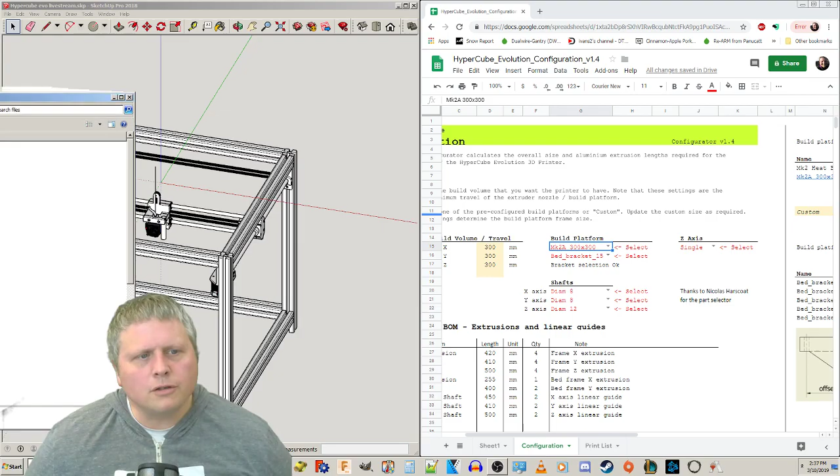So that's why we're going to use- hey, man, the guy who designed this, big ups to Scott 3D, again, went above and beyond what the normal RepRap person does. There's a kind of an attitude in RepRap of like, hey, man, I've done a little of the work, tough luck, you don't need me to hold your hand through it, and I like that, actually. It's reaffirming of that kind of experience-is-king attitude that dominates real makers.

And but you know what? It doesn't hurt to kind of help people along when they're new.

So look at this thing here. If you look in the folders for the Hypercube Evolution that Scott 3D has shared with us, there's an XLSX file. It says Hypercube Evolution configuration. That's an extension for Microsoft Excel spreadsheet, which does the calculations for you.

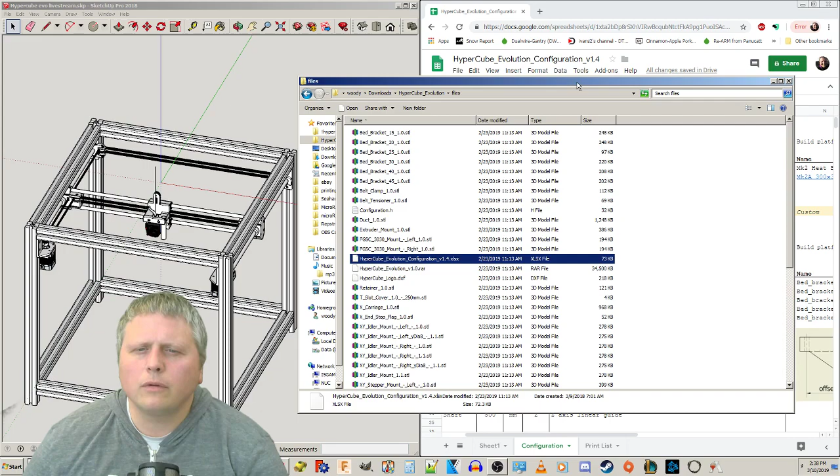You don't need to actually own that. What you can do is take this and upload it to Google Drive, which is completely free, and have it convert it, and it seems to work just fine in Google Drive, at least for what I've been doing. So let's take a look at this document that I have imported. If you need help doing that, there's a lot of guides on the internet on how to import spreadsheets into Google Drive and convert them and use them live.

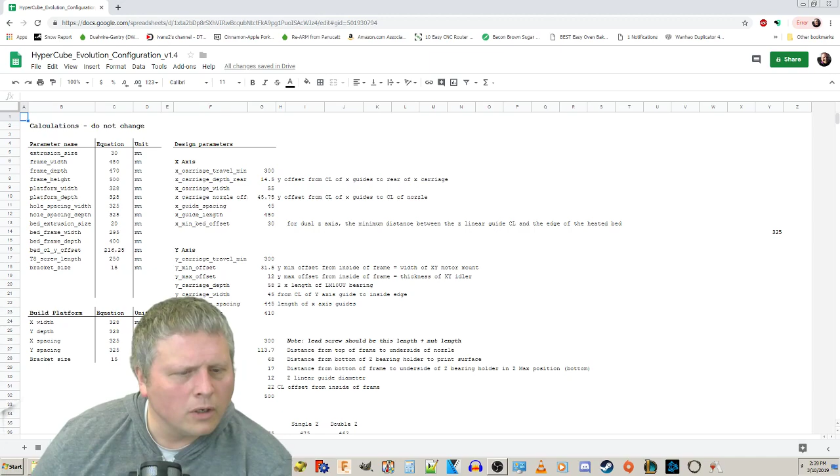Okay, so if we look here, you're going to start on this sheet, and this one doesn't seem to be as useful, at least for what I need right now. Basically, what I need to tell you is that I have been building it with the wrong dimensions. I just assumed, let's use 500 millimeter rods. Now, there's a good reason I'm probably going to end up doing that when I made my modified version.

However, the whole point of making this on SketchUp before we go into something more advanced like Onshape or Fusion 360 is the idea that you want to just get an idea of how things work together, and that's what we're going to do here. So we're going to actually build it true to what Scott 3D had intended, with the exception of the bed and some things like that. And there's some good reasons for that.

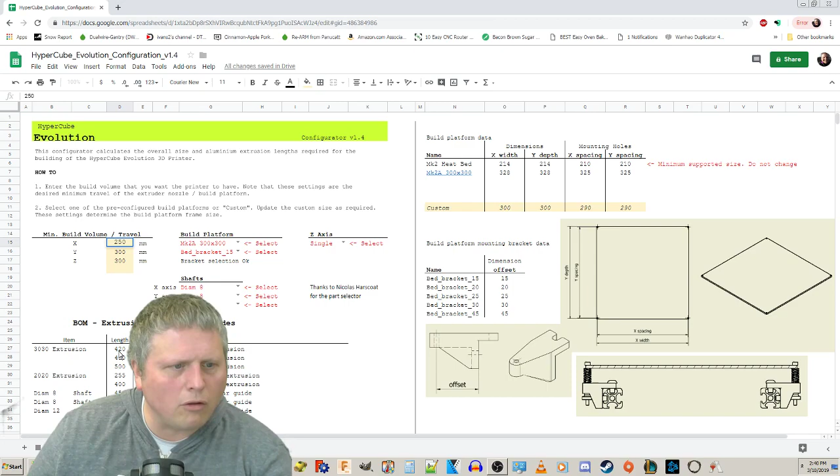All right, so look, 300 by 300 by 300. You can put these travel in here. Now I'm not going to change these for right now. I'm actually going to adjust it down to what his default settings were. Because if you look here on X, if you change this, let's say you said, nah, man, I only want 250 - watch what happens. It will automatically update the data down here for how long you need to cut your extrusions and your shafts.

So let's see what that changes. Okay, so now look down here and see what did that affect. So I'm going to undo it with Control Z. Okay, so it looks like if you follow this, it's changing the length of the shaft for the 8 millimeter shaft you use. Yeah, so see, that's how this thing works. We're going to go back to 300, right? So it changed also the extrusion length.

And so what we're going to do is go through here. Those look fine for now. The only thing I'm going to change from his default is the MK2A heated bed. I think that's a terrible choice for this project. I would never use that.

And the reason is because on the MK2A, the mount holes are all the way at the side. If you look at the video he made on it, he had to actually add extra support to hold the middle up because it was so far cantilevered. It's probably not a good choice for this. I'm going to use a custom choice for my heated bed, and that information is just basically which column we're pulling from - or not a column, I guess it would be a row, or the custom. I want it on custom because what I'm going to do is use a widely available, cheap CR10 heated bed.

It's the one that people are using for the CR10. It's widely available, probably cheaper than that one, and a better choice because the mounting screws for it are actually further in. They're not all the way out at the edges, and so it reduces significantly the offset in these holes, which reduces the amount of sagging possible in the middle that Scott 3D himself admitted he experienced in his videos. So if you look at this, it's 310 by 310 for the external dimensions.

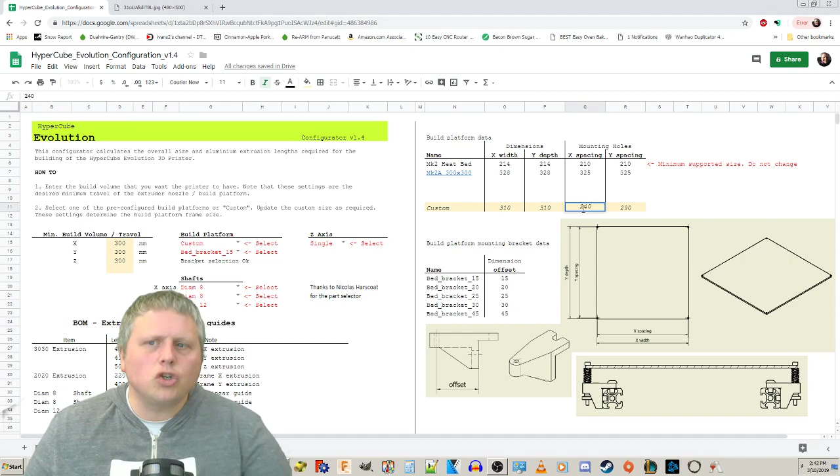It's actually, you have to take away 35, 35 on the other side. That's 70 total. 310 minus 70 gives us 240 offset between all the holes. So I'm going to go in here and put 240. And this should make some changes, 240. And so now this gives us, oh, and we didn't do one thing.

Now look, here's another thing that's important to understand. So another configuration that we have to have is the bed brackets. And that's these. I'm going to use the minimum size possible because I don't want them cantilevered and hang out 45 millimeters from here to here.

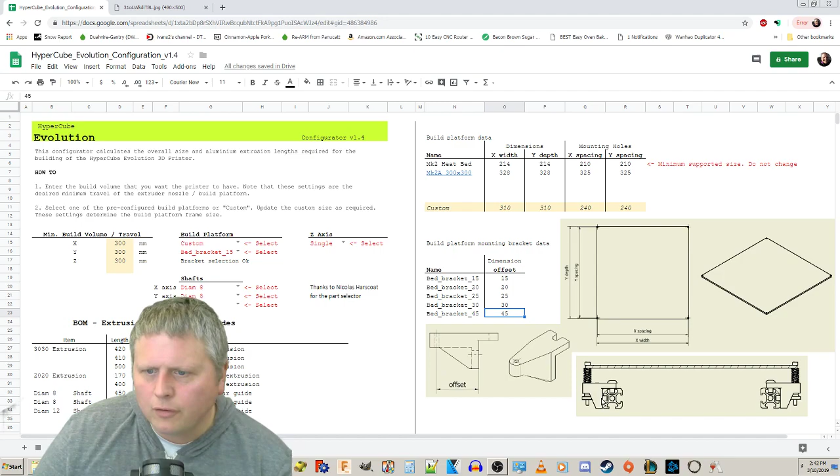If you don't understand this fully, the side, if you look at the bed here, he's got a cool little picture here, by the way. Another, just, man, that's killer. Like the fact that he has a picture of that, that's awesome. And it kind of explains what these dimensions mean, is that I want to keep this offset and overhang of the bed screws as minimal as possible. So I'm going to use these bed brackets 15.

Now this part is important. If you're making the 300 by 300, I can tell you the whole reason that Scott 3D, I've watched through some of his videos, even made the double z-axis is because when he went to a 300 by 300 millimeter bed, what he found is the single one was too vibrational. Worked fine for the 200 by 200 millimeter version, but he found that it was much better performing with the double z-axis if you're using a 300 by 300 millimeter bed.

Okay, so I'm going to go with a double z-axis there. Well, what am I talking about? Well, here's the difference. If we look at this, I hate the way that they did this.

Yeah, Thingiverse is the way that they do their images now. Thingiverse is such an awful website. I mean, it's just, if it even works and loads all the time proper, even on good internet, it just doesn't. Ugh. Anyways, so look how hard it is to even download this. And part of that's probably my internet, and part of it is okay. Well, there we go. Okay, so let's take a look.

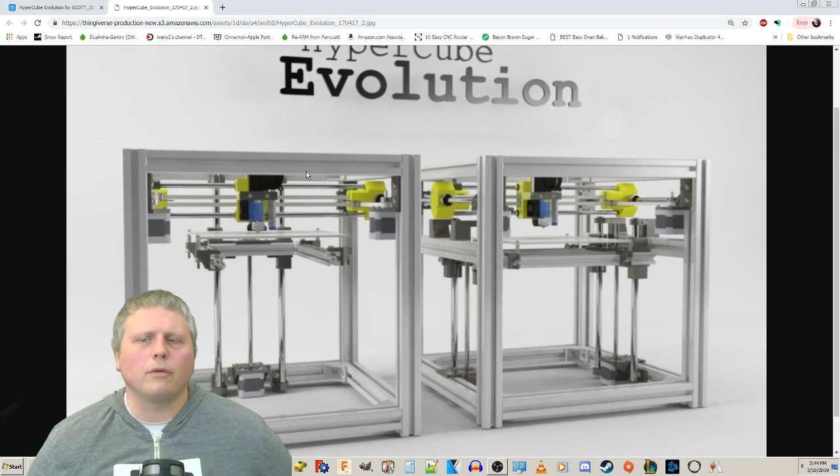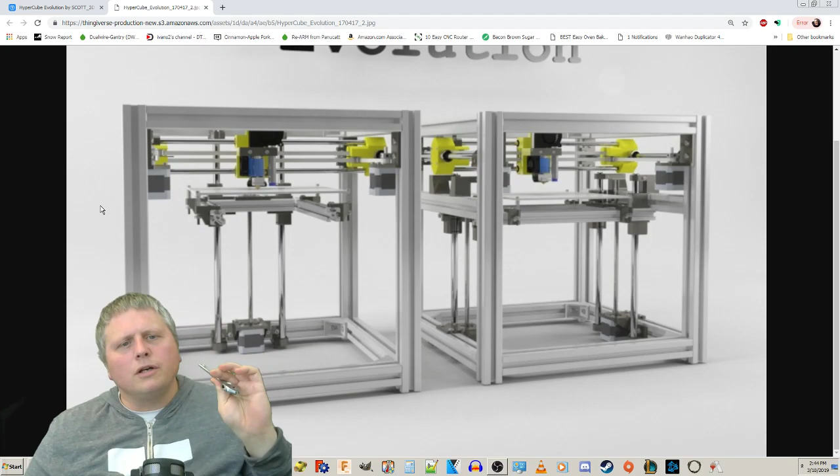This is the single axis version. It works pretty well for 200 by 200 millimeters, but the problem is it's cantilever. What that means is that essentially picture this as the back of the bed and this is the front. The bed kind of hangs out, and so it's only supported by the back. That's what this guy is right here. Okay, what he found is that when he went to a 300 by 300 millimeter bed, that overhang caused it to be very stable at the back where it was anchored by the 12 millimeter rods.

But as Scott 3D moved to the front, by his own admission, this started to kind of vibrate from the cantilever. Cantilever just means like an overhang design. So what he did was he basically copied it, where he took basically what was the z-axis and moved it to one side and copied that to the other opposite side, so it's held up by 4 12 millimeter rods and it's actuated by 2 lead screws or threaded rod, whatever you're going to use for that. And he found that this was much more sturdy, much more stable for the bigger 300 millimeter size.

And you could even do this for the 200 by 200 millimeter version as well if you wanted to. Look, man, we're going to definitely be using this because 12 millimeter rods are very cheap compared to what they used to be on the market.

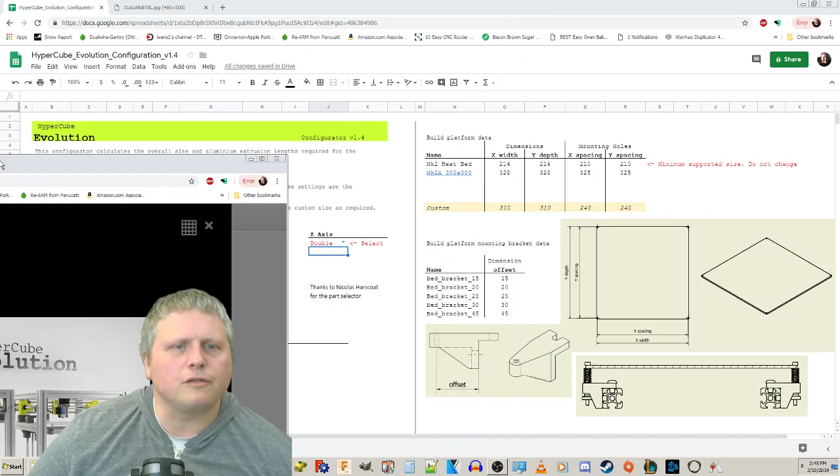Okay, so anyways, we're going to use the double z-axis version of that. I'm going to select double z-axis, and you can look as we change single to double. That definitely changes these and changes how many you need of each one.

Okay, so we have it 300 by 300 by 300, and my problem is when I made the first 2 videos, I did not follow these recommendations for length. I did it based on the shafts all being 500 millimeters. And there's a reason why I'm doing that: if you've ever had to cut hardened chromed steel rods, they're not easy. You have to use an angle grinder or get a special blade for your chop saw. I have those things, but most people don't, and it's not a fun experience if you're not used to working with metal. So that's why I would not recommend using these values.

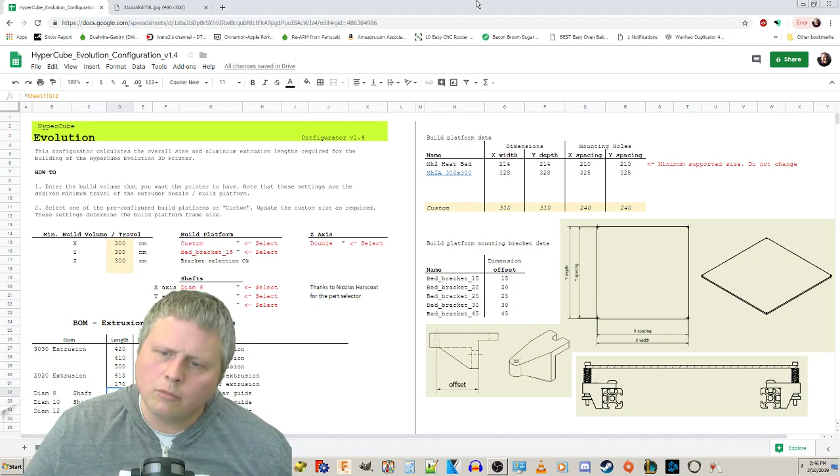But remember, we're building it the way he did it first, and then we're going to modify it later. With the exception of the bed, I cannot go any further using the bed that he used. I couldn't see any reason why I'm doing it because I'm never going to use that bed whatsoever.

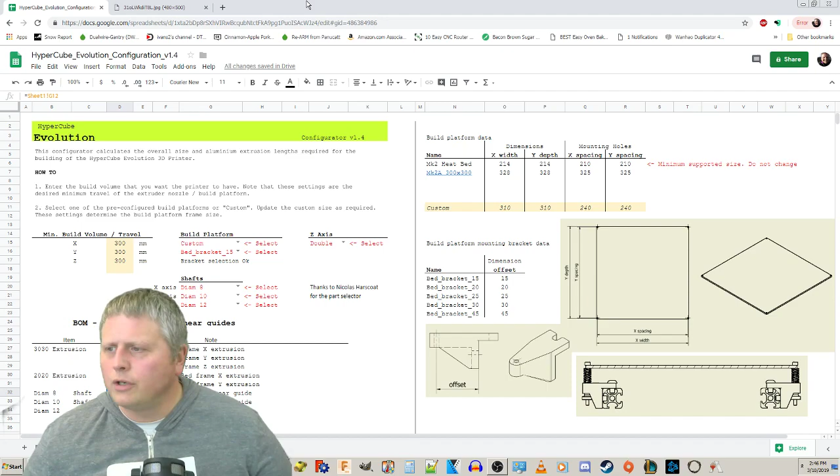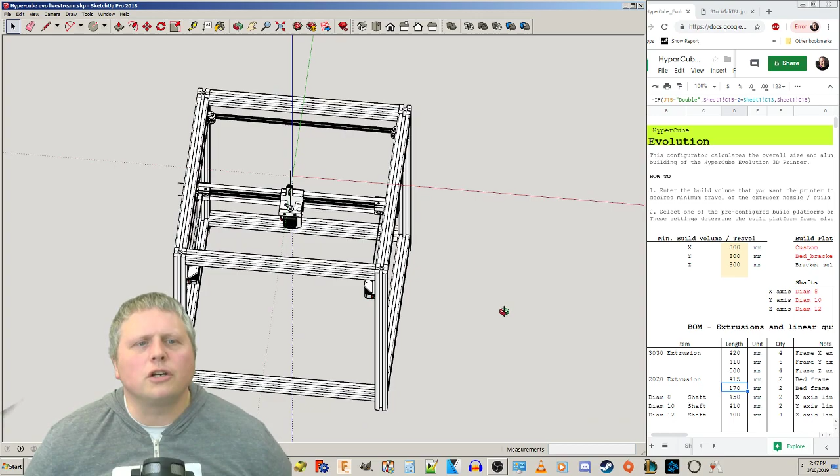So let's go ahead, I'm going to move this over here because we need to reference these values down here quite a bit. Okay, that doesn't do it dynamically, let's move over a little bit. We don't need to see that. We can drag this one all the way over to here, so we'll have minimal interaction with this from here on out, but we will be able to see the values we need. So all I'm doing in this video is updating and adjusting everything. This is useful because you're going to have to adjust your designs as you make them.

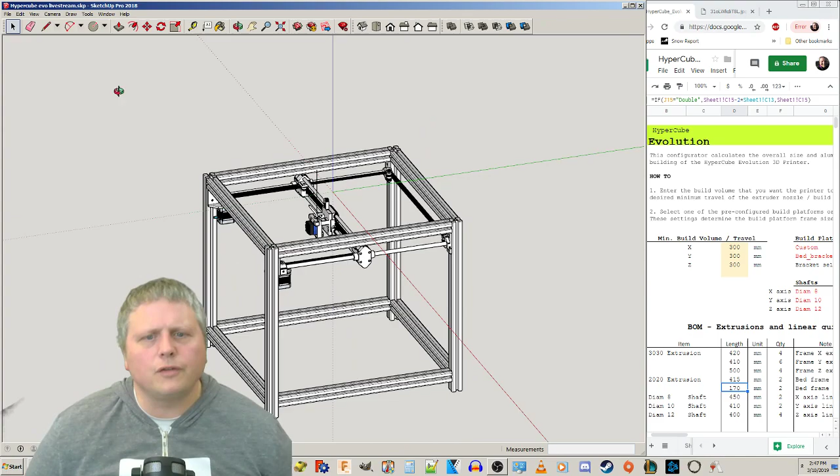So I've turned off perspective in the camera, turned it to parallel projection. SketchUp will break from time to time, and you'll have to go back to seeing perspective. If you start rotating things and you see through halfway through objects, it glitches. Just do that. All right, so let's take a look and fix what we need to fix.

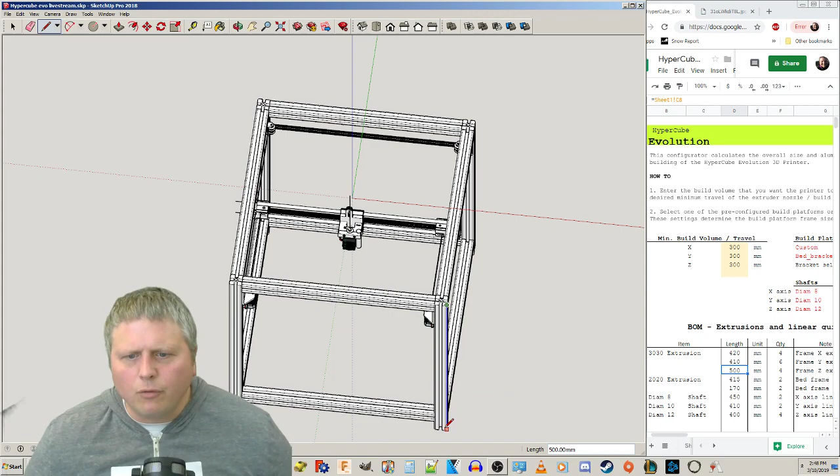First, let's get the extrusion lengths correct: X, Y, and Z. Now look, my Z is already, if you do a vertical measurement, you can see at the bottom right down here, way over there, that we did get to 500 millimeters. I don't need to fix anything for Z.

Because I need to fix this one and this one, I'm going to select them both and move them over here. All I'm doing is exposing the ends, because if I try to adjust them, I'd be pushing on these ends. Well, you'll see.

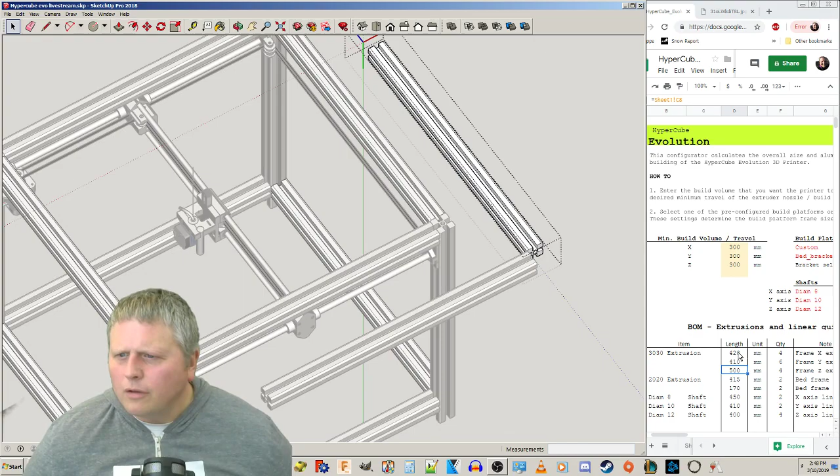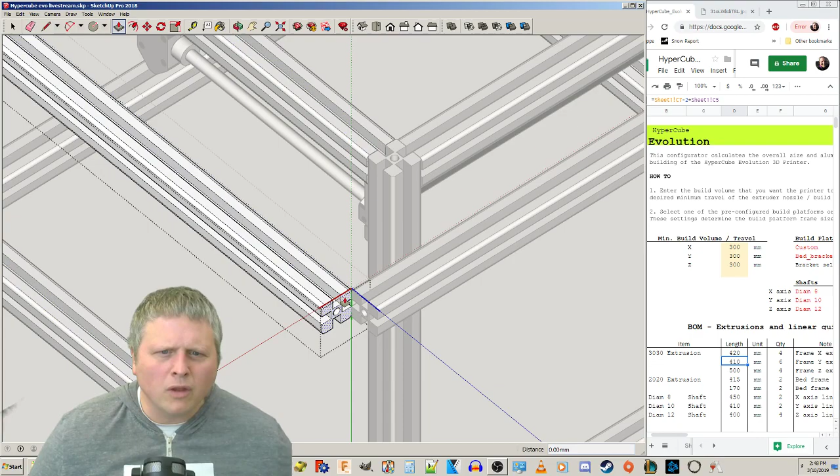Okay, now let's see. This one says that for the y-axis, let's see what I did. I think I did 500 millimeters. Okay, no, for the y-axis it's going to be 410. That means I have to get rid of 90 millimeters, but I'm going to do it evenly on each side, so it's 45 millimeters from this side. Be careful of those little mini clicks that don't do what you want them to. Is that right? 45. Okay, and I'm going to push it in 45 from this side, that way things will be centered on the originals.

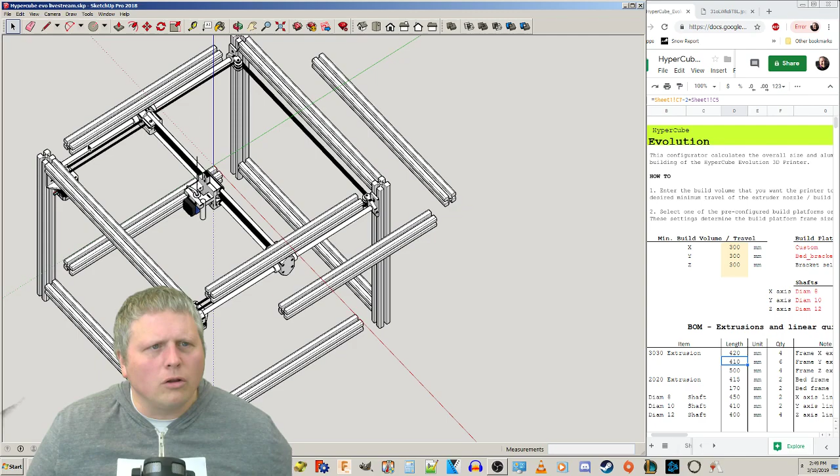And this is what's nice about SketchUp, is that these are components, so it updated all of these the same. I'm going to delete that, I don't need it anymore.

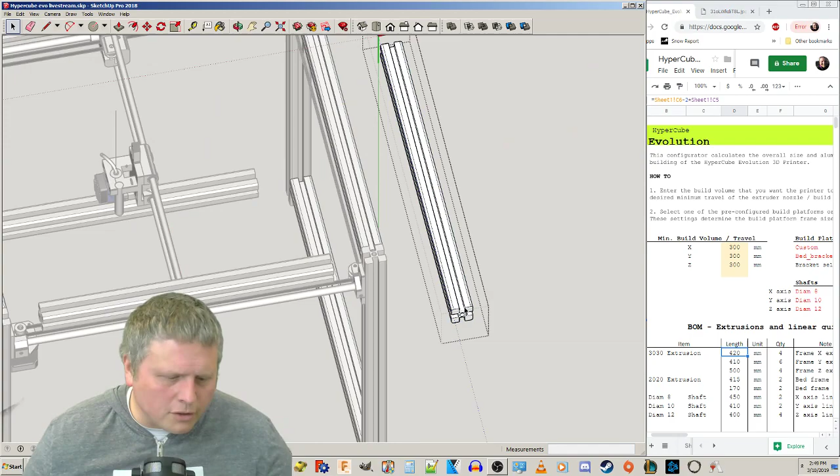Okay, this one, let's see what I have. I have, for the x-axis, going across, mine's 470. I need to reduce that down to 420. So that's a difference of 50, but it's going to be evenly distributed on two sides, so I'm going to go 25 on this side and 25 on this side.

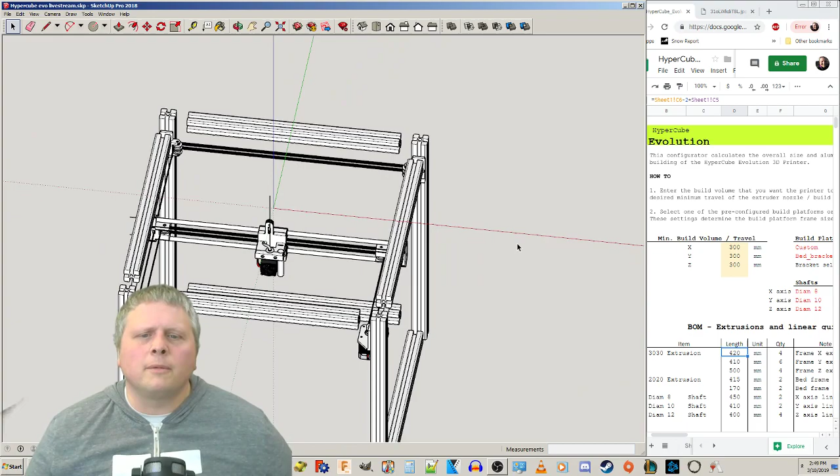So all we're doing is just getting this to more the way that the original designer had intended. Okay, looks pretty good. And so now we have all of our aluminum extrusions, they are not in the correct position. I'm going to wait till later to do that because there's a pretty cool shortcut you can do to make this a little bit easier, I would say.

Okay, what else? Something else that's going to need to be adjusted: these belts.

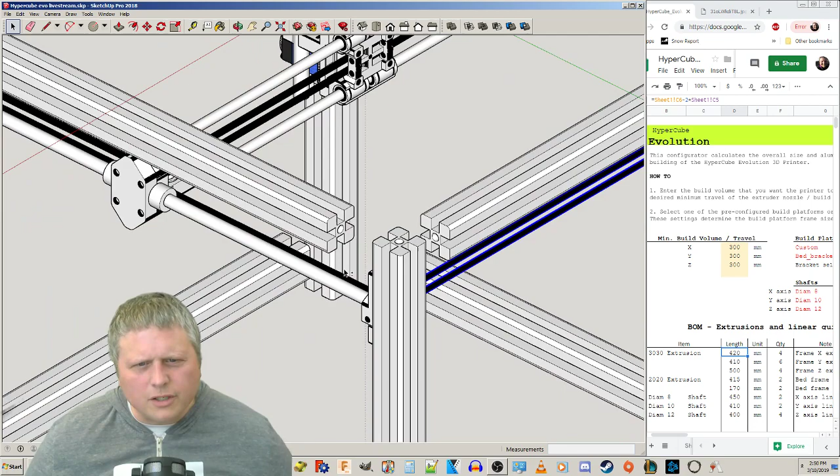So let's move a copy of these belts here. I'm going to grab them all at once so we can just do them all in one copy. So I'm going to move it, control to make a copy, and move it out here.

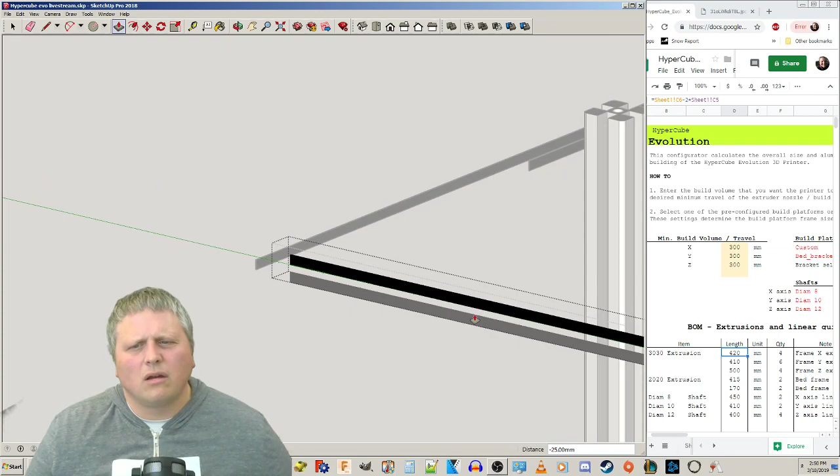You see the glitching I was talking about? It's starting right now. So let's go ahead into these. This was, the y-axis got shortened by 20, or x-axis 25 on each side, 25 here. And there's the glitching. I don't know, maybe it's not. Maybe I'm just... maybe I don't know what I'm talking about.

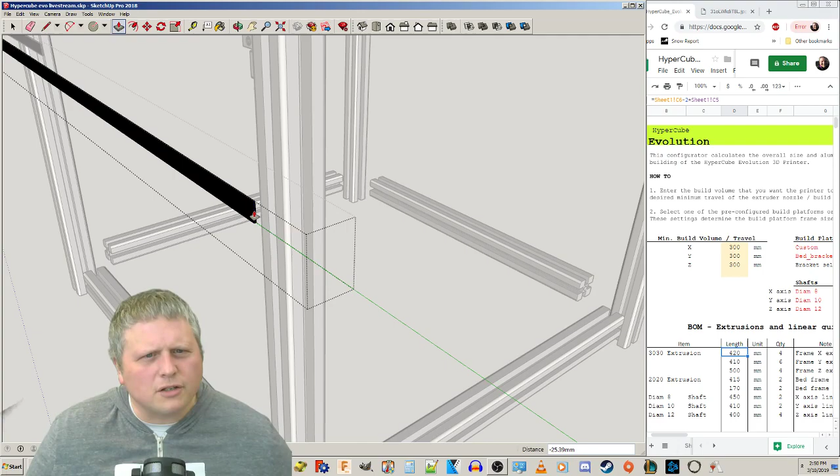Okay, 25, done. Don't need those. This one, 45 on each side, because that's what we shortened the y-axis by just a minute ago. 45 here, and 45 here.

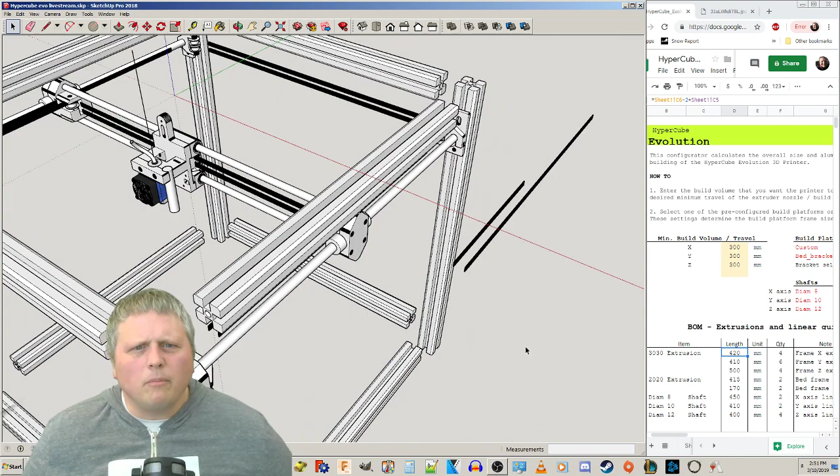This one, you know what? This one probably isn't even necessary because I realized later on that it doesn't really look right if we move the axis around, but let's just shorten it 45 on this side just for the heck of it. Okay, so that looks like things are ready to be moved around now.

Oh, one other thing. These rods are significantly shorter, so let's move a copy out here. This got shortened up again. If we look at the rods now, the Y shaft is 410.

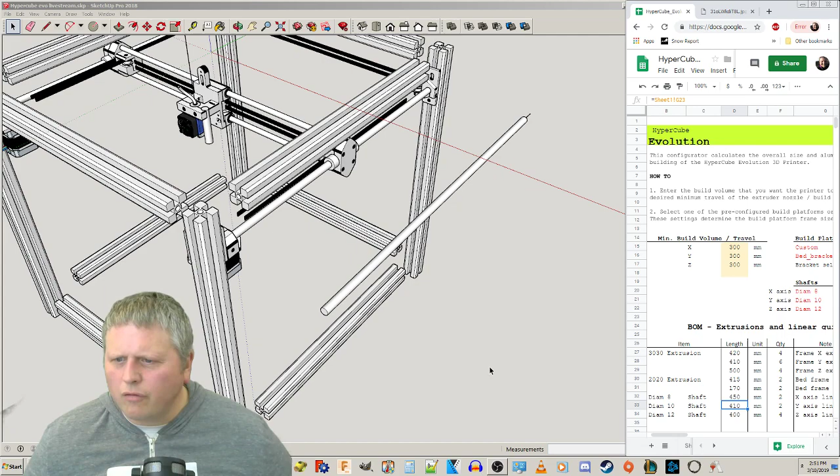Excuse me, 410, which means it's 45 shorter on one side, and also 45 shorter. Whoops. 45 shorter on the other. Cool. And get inside this group.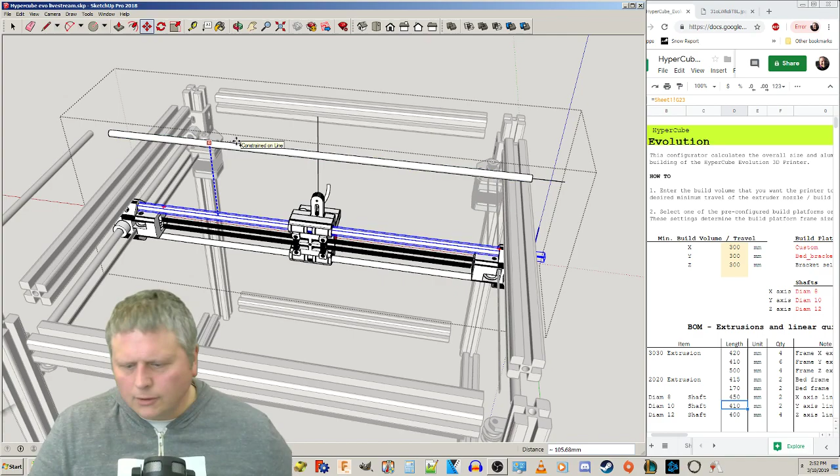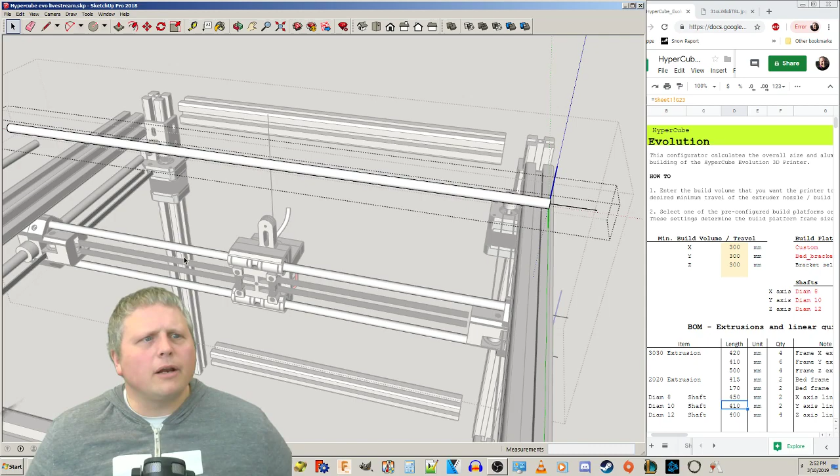Make a copy of this. 45. Did I say 45? Sorry, my bad. These were supposed to be shortened by 25. 25.

Okay, cool. So now we have those shortened down, and here we are. The supposedly Core XY is compact and saves on space. This design does not bear that out. I'm going to get into that later because that is a common thing that people parrot about Core XY.

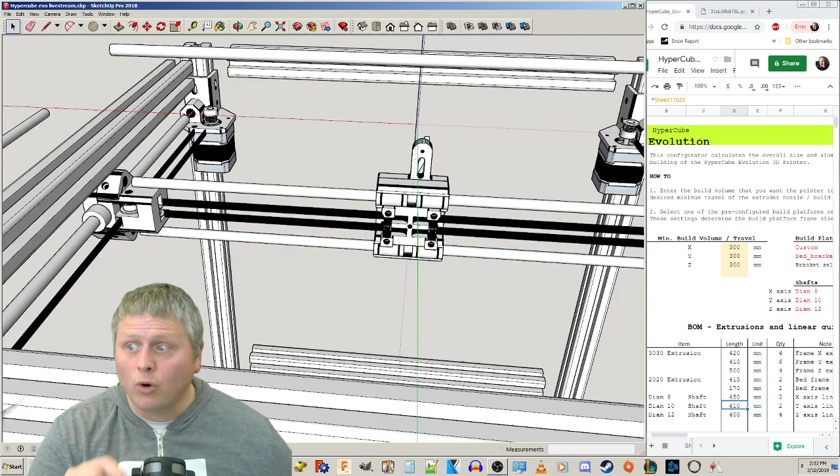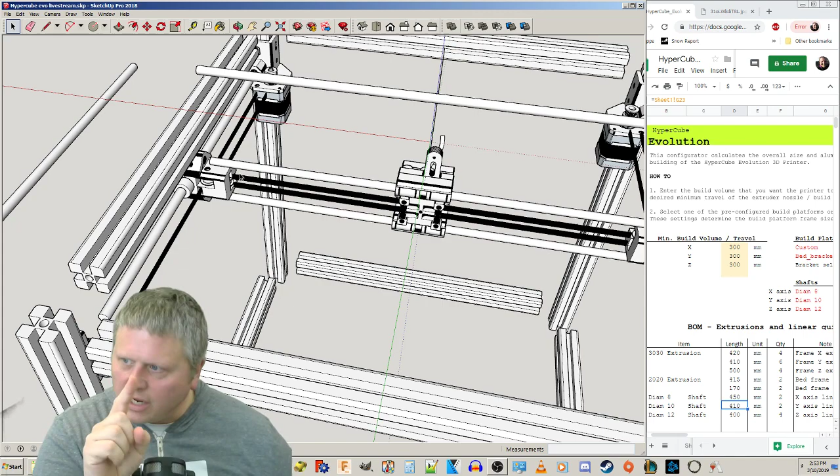And I would say for the y-axis, that is correct. It is very space efficient for the y-axis. At least with the implementations that I'm seeing of it, it is not a space efficient design, let me just repeat that. It is not by any stretch of the imagination a space efficient design for the x-axis, period. Maybe I'll get into that later in other videos, but everybody says that. They like to say it all the time, but at least in the implementations that I've seen, the most popular implementation of Core XY is right in front of you.

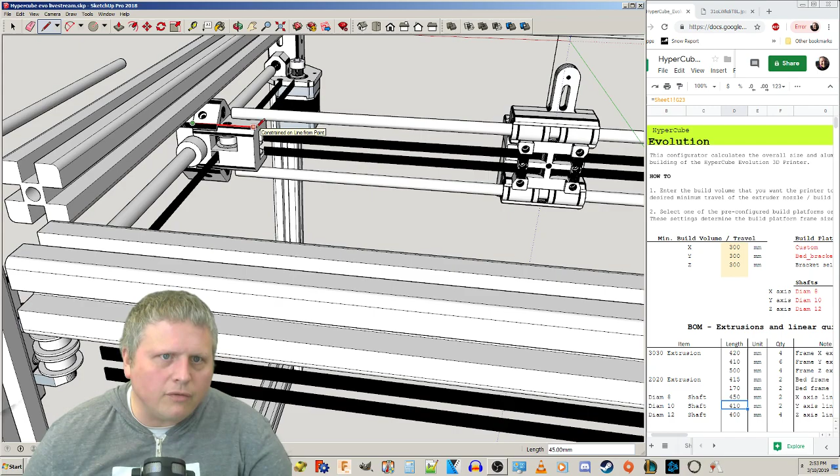It is not a space efficient design, and we will get into that later, but you can see all of this space, look at the wasted X-Rod space here. Look at this. Not necessarily all wasted, because even if you did it more efficiently, you would still have to get rid of some of this. But look at this. This is 45 millimeters length.

And let's say that you had to clamp it with 10 millimeters. That's 35 millimeters on one side alone. That's just wasted X-Rod. I'm going to get into this later. If you compare that to a design, let's say Micro-Wrap 100 or 200 like the one I designed, it's much more space efficient on the x-axis, but not nearly as space efficient as this on the y-axis.

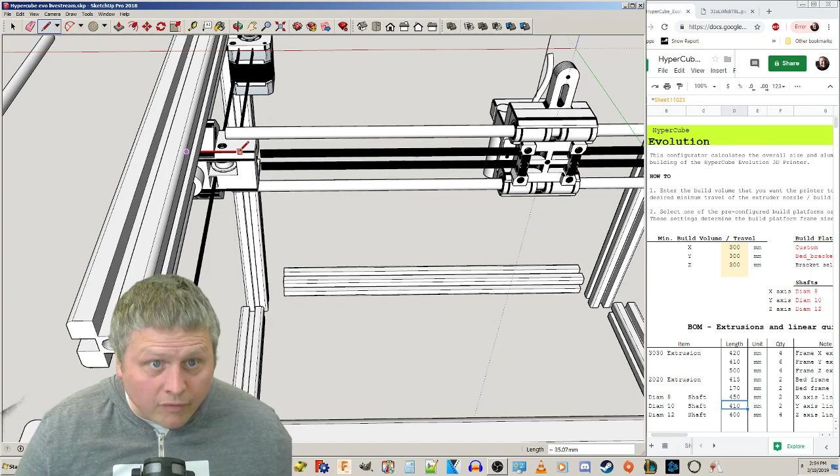So you'll see that parroted all the time about Core XY. Do not believe it. It is not true. It happens to do with the fact that no matter how you cut it, you have to have this extra wasted space from travel from the middle of the motor out to the edge. Again, I'll get into that later, maybe in a later video. I'll have time to go over that with people.

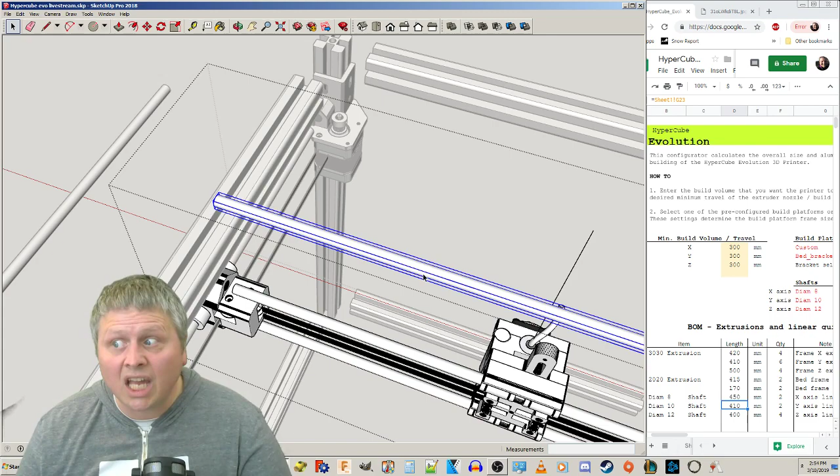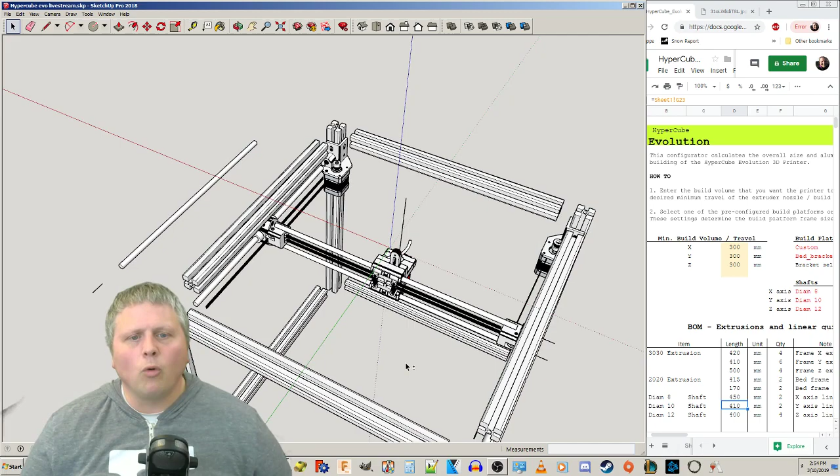Doesn't mean Core XY is bad. It just means that one of the selling points that people parrot again and again and again, it's not valid. Simply put, it's not valid. Again, it's not bad, but I'm just saying this implementation in particular is not space efficient. Do not believe it. When people tell you it's space efficient, it is not. You are not getting the smallest printer for the most amount of print area. You're not. Simply put, you're not. Not with this one. And the y-axis, like I said, I'm pretty impressed. It's pretty good. The x-axis does not hold up in court.

Anyways, I'm kind of ranting on some stuff. So let's go ahead and get me off that rant. And let's get a top view.

Okay, so let's get rid of this. This was one of our helpers. I'm just going to move it around. So what I'm going to do is I'm going to explode, so these are broken into parts, and I'm just going to grab...

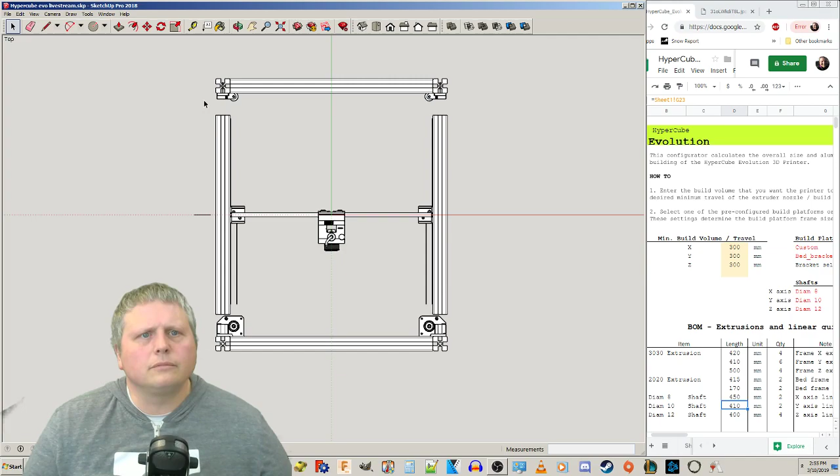Remember, selecting like this only grabs the stuff that's all the way inside of the box. Hey, that's it, that's what we need. And I can hear my dog scratching her collar there. We're going to move it in by 25 because that's what we shortened the x-axis by. And same thing over here. Nope, wrong selection, sorry. There we go. And we're going to move this in by 25. And let's grab these guys, move them up by 45, because that's how much we shortened this by.

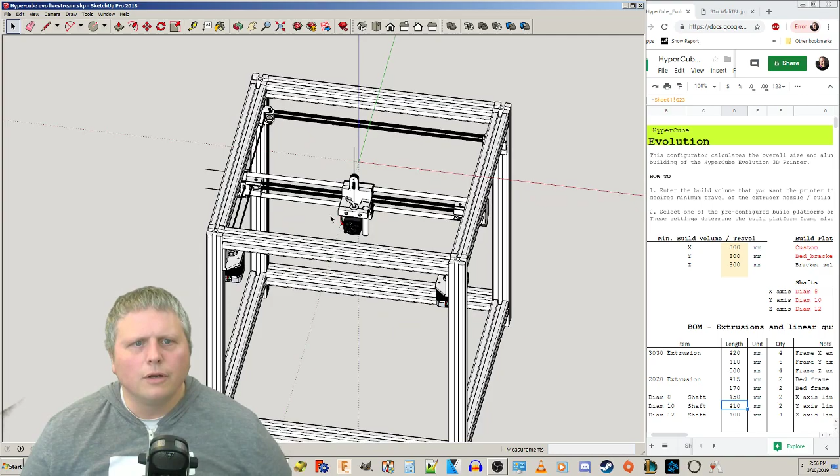So again, now we have something that looks a bit more like this. Now hold on, there's some other things. If we look here, let's get back to this picture here. So if you look here, check it out.

This has another rod, another piece of aluminum extrusion down here, and so we're going to have to copy this. After looking it up, I didn't know exactly how far to go. The offset here should be 130. So we just do another copy of this, 130, move it down on the blue axis, 130. Probably should have grabbed the other one before I did that too, but I didn't, so let's do that again.

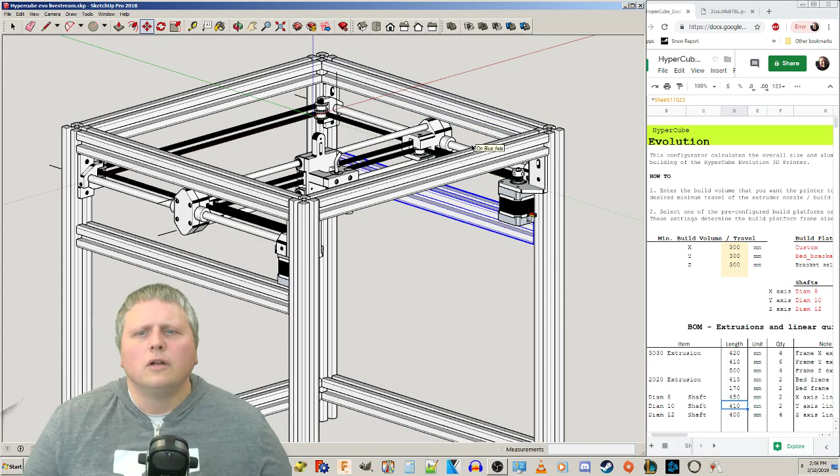And if you're using 48 millimeter motors like I plan to do, these are the larger steppers, a little more torquey I guess you could say. These guys are barely going to fit. I think it came out to be 1.2 millimeters clearance there. Just keep that in mind if you're building the original.

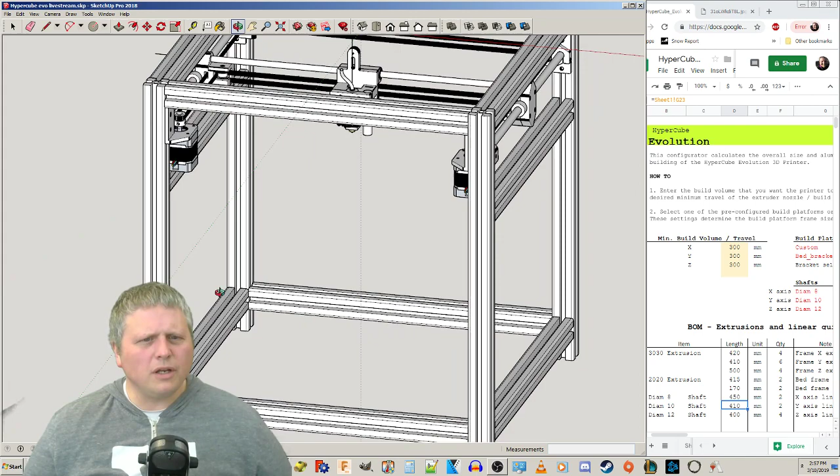Okay, so we've got that done. What else did we need? I'm also, from this, not exactly sure that these are correct. I'm going to probably further align these when we line up the z-axis, because I wasn't able to find exactly where these go on the design.

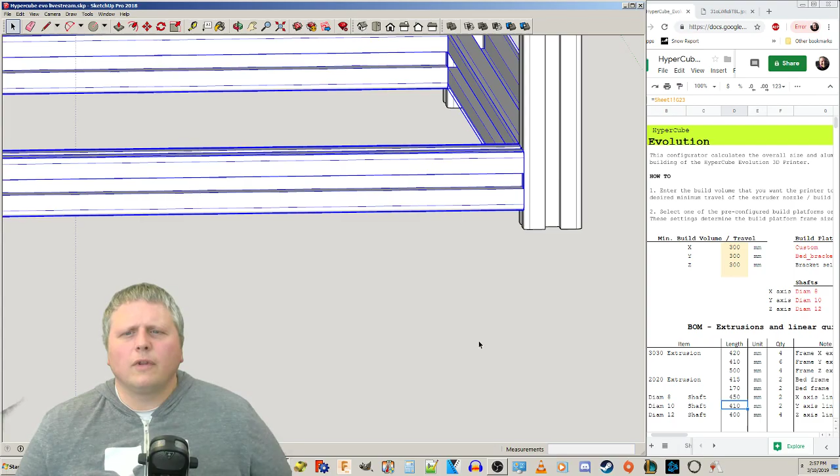And there we go. And just to cap off that rant I went on earlier about Core XY not being a very space efficient platform in terms of the x-axis, again it's not a criticism too bad, it's just that some things work well and other things don't.

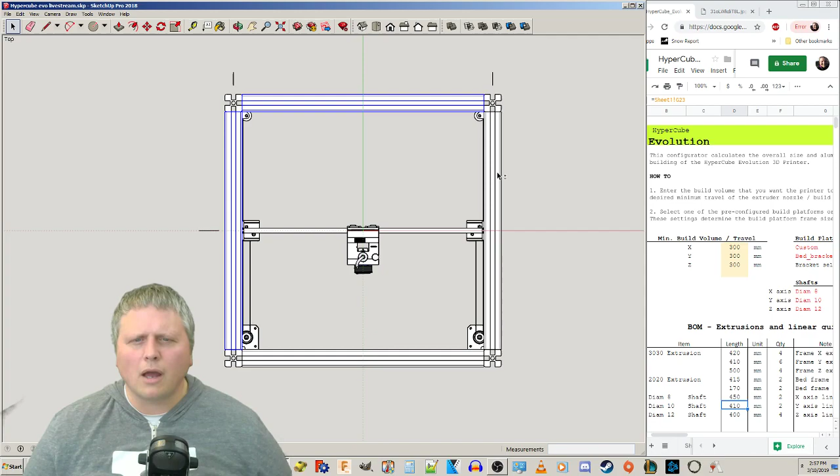Let's take a look at that real quick. And just before, if you want to stop the video right now, go ahead, I could understand that. Let me just, so I don't mess with this too much, let's just make it a group. Yeah, make it a group. Move a copy over this way. Let's move it over 1 meter, 1,000.

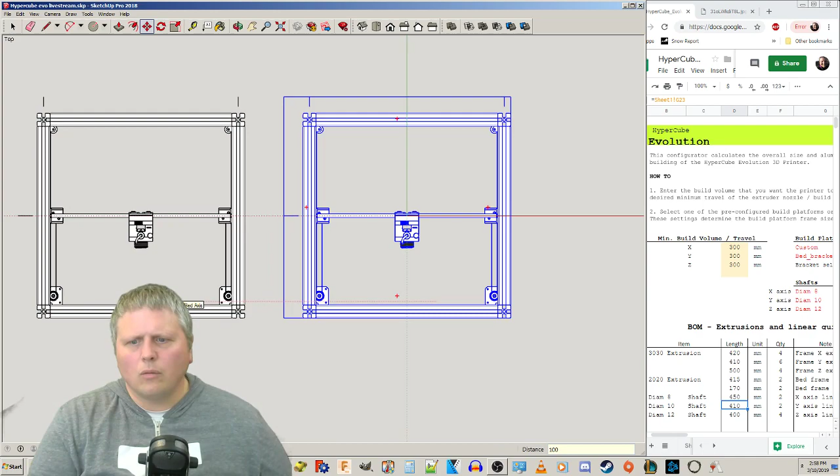All right, so look, here's what I was talking about earlier in case you think I'm just a raving lunatic. Here's the problem with Core XY that other printers don't have quite as bad of an issue with. So I'm going to delete these so that we can get a good look at the kinematics. Get rid of this, get rid of this. Okay, get rid of this stupid frame, we don't need that.

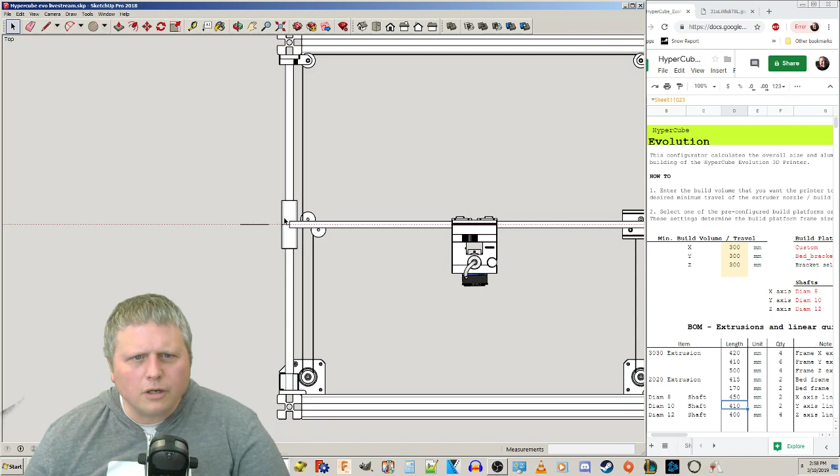All right, so look man, here's the problem with Core XY. I'm even going to explode and delete this because we really just need to get rid of the plastic printed parts just to see this, okay? And this is the problem with all the claims that Core XY is the premier in space efficiency. It is not. Simply put, I don't agree with those people, I think they're wrong. So let's take a look at this.

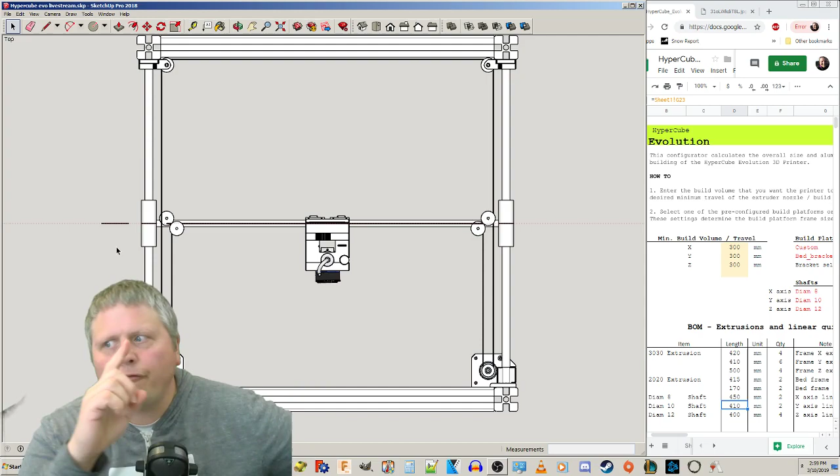It works pretty good for the y-axis compared to most other designs. Particularly the problem with the Prusa type designs is that they effectively double the y-axis. So your print area, let's say, is 200. At the very minimum, the print bed has to go 200 millimeters all the way to the front and 200 millimeters all the way behind the back printing point, which means it effectively doubles the y-axis travel, which is very bad for a very large printer.

So if you have a 300 millimeter printer, like the CR10 for example, where the y-axis bed, let's bring that up real quick. Here it is. So the y-axis bed, see this bed here? It moves all the way back. So when the printer's printing at the back, this bed has to move all the way to the front, which means your desk space, the footprint of this printer, is very large in the y-axis, extremely large, right? Because it has to double 300 plus a little bit extra just in case. So that's bad about these things.

However, you can see that the MicroRAP, for example, I'm going to go with MicroRAP 100. Oops.

That was one I made. The reason I chose not to go with Core XY for this printer was I was absolutely, the whole point of this printer was to make a tiny, compact 100 millimeter by 100 millimeter printer. Now, you might say, that's way different than what he's doing. Yeah, you're absolutely right, but I want to point out something very important.

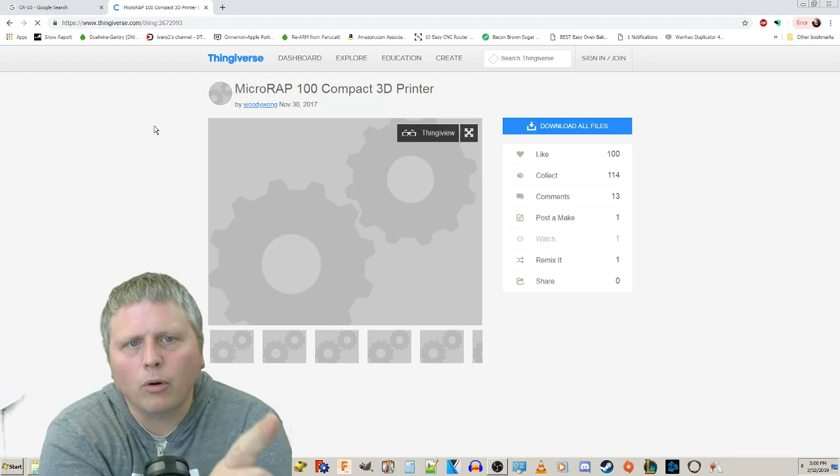Doubling 100 by 100 with a traditional moving bed means you're only adding 100 millimeters, or maybe a little bit more, to the total footprint of the printer. Doubling a small number is not bad. Doubling a massive number like 300 adds another 300, while doubling a small number like 100 only adds 100 millimeters. And I would say Core XY wastes more than that on the y-axis, so you can see it doesn't scale well. That moving bed design does not scale well up to larger beds on the y-axis.

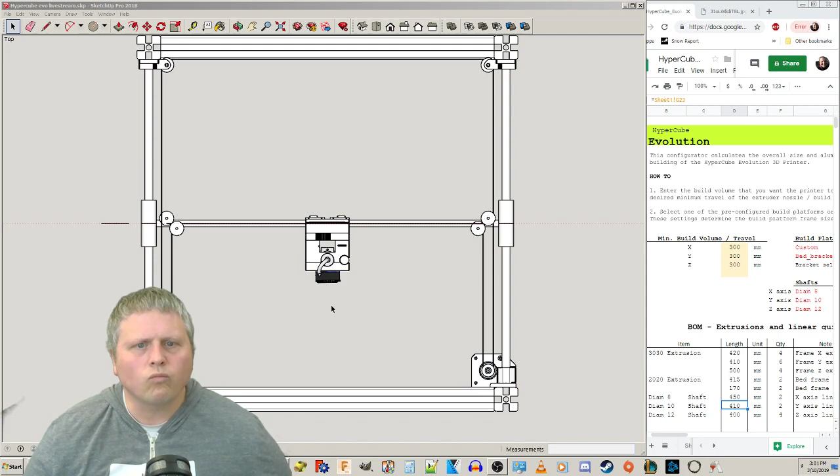So that's one thing I'm going to give credit to Core XY for: if you're making a large printer, it's pretty good for that, because you're not wasting a whole lot of extra space.

Now let's look at the x-axis. On MicroRAP 100, the x-axis, the whole printer is designed to be like 100 millimeters. It's going to add 100, and I think 2, to the external dimensions or something like that. Of course there's material thickness to deal with, but it basically adds an extra 100 millimeters.

Whereas this printer right here, we already saw it was designed to do 300 by 300, and let's look at it: 480. So whereas the MicroRAP 100 gets away with like 100, 102 extra — and hey, to be fair, they're not even enclosing it like MicroRAP is.

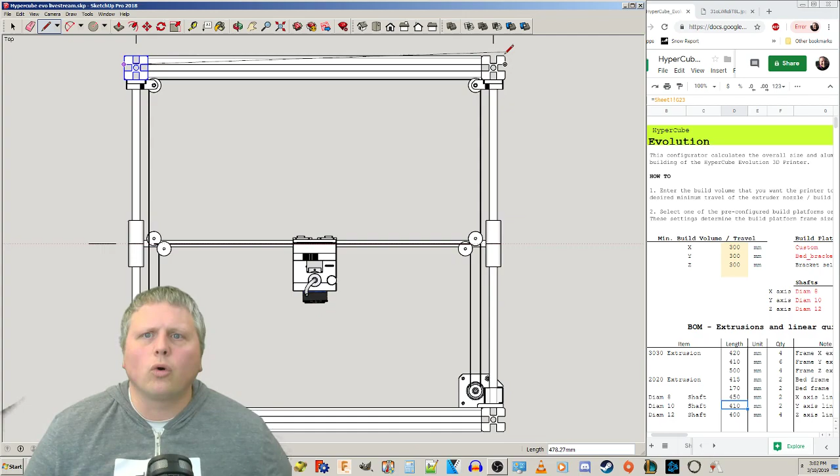So look, man, this is a myth. It's a common myth that Core XY is a very space efficient design. We can see here this is adding 180 extra millimeters.

And about 55 of that comes from the width of the carriage. That's not printable. You're wasting that much of the printer's width, and it's almost inevitable — you have to have some width to the carriage, right?

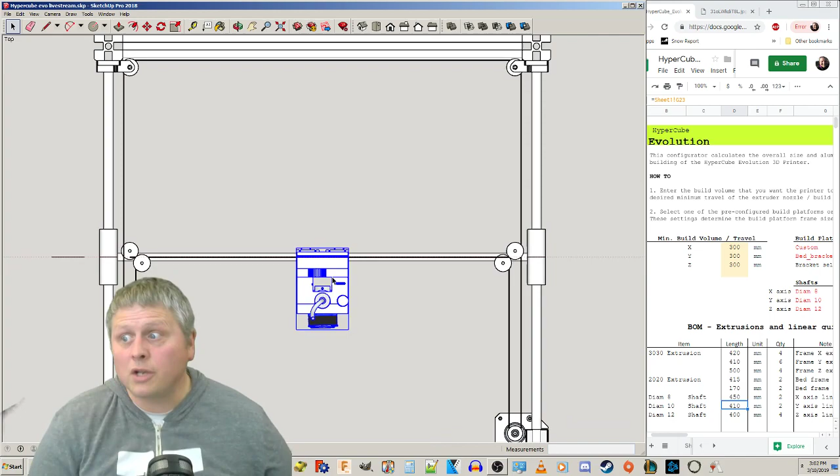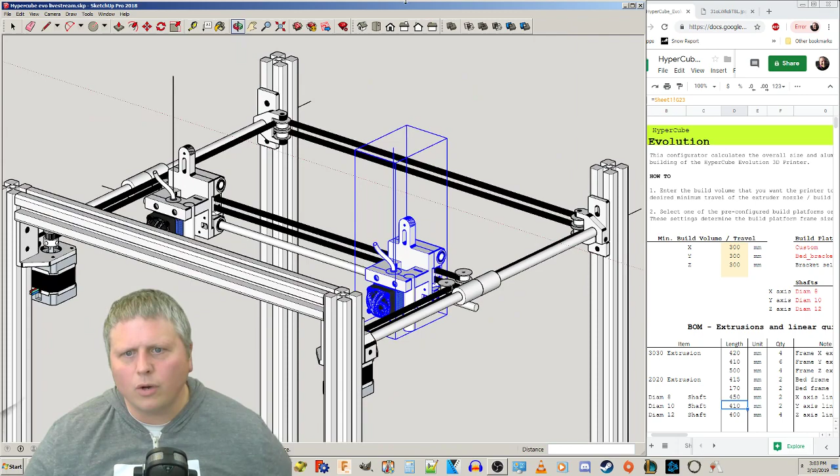Otherwise it doesn't exist. But the thing I do not like about it is, let's take a look at this. I'll move this over 150... and so all of this extra rod is just being kind of wasted on the x-axis. Now I've cut some of that stuff away, and the reason is because Core XY has this inherent flaw — or it's not a flaw, it's just something true about it that you have to design around.

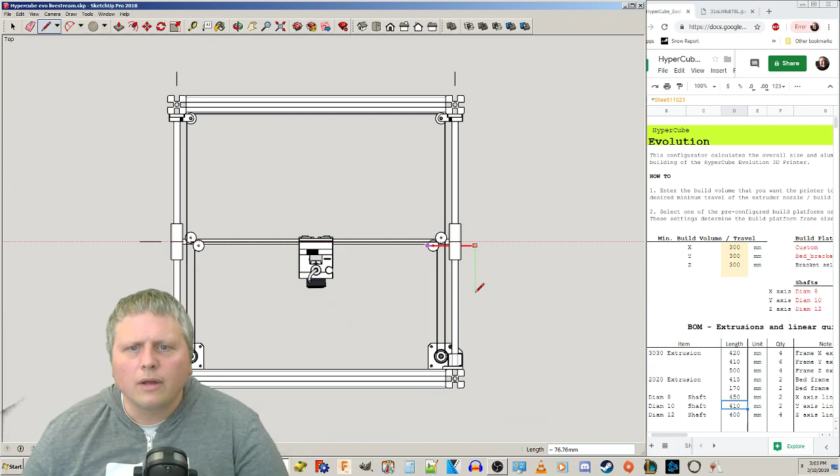See this distance? No matter how you cut it, the carriage cannot travel past this point. Now there might be some clever ways to manipulate this, I'm not going to lie, but it cannot. And look at this — I don't care how you work around this and design your printer, your printer is going to have extra width from here over to here, and then it comes tangent here and over to here and all the way out.

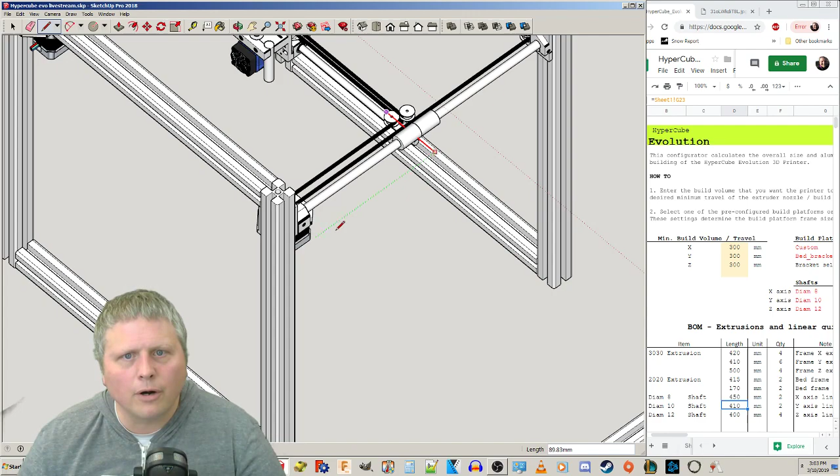Not bad. And what do we get out of that? Well, it's worth it probably, because look at this — we get X and Y actuation without moving any motors around. Both of these motors are stationary on the frame.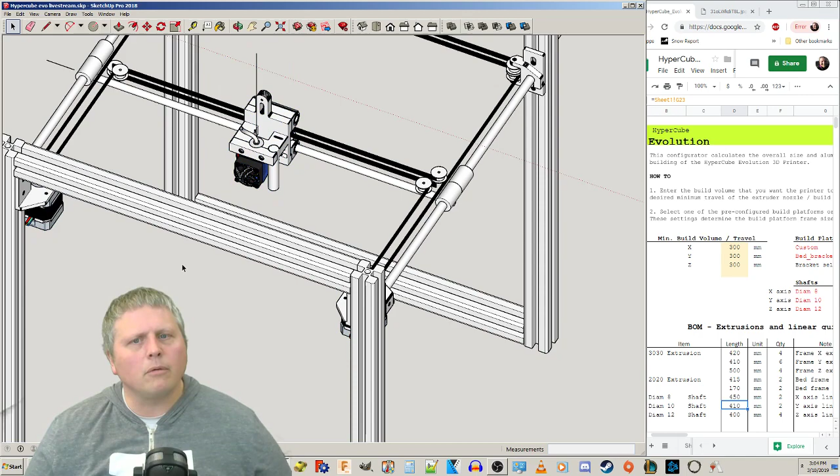So is it worth it? Probably. But this idea that people will constantly post about, and that you know better now, is that Core XY is very space efficient for the Y-axis, and it can be, depending on how it's implemented. It is not space efficient, I would say, for the X-axis. It's just not — there are better options. It's not bad, but there are better options.